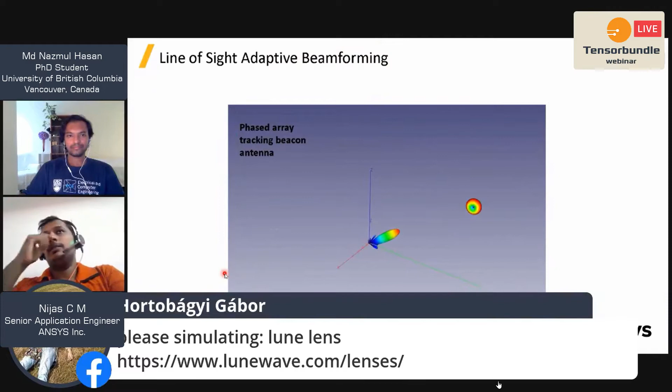But there are some high frequency bands also allotted. 28 gigahertz is the main one, and then 60 gigahertz is the other one. There are some limitations if you go with higher frequency. The advantage is you are getting very wide band. Your data rate will be so high. You can transfer data within seconds. The problem is that at higher frequency RF losses are very high. If you have a base station at 28 gigahertz outside, you need such a base station every 250 meters to have good communication. After 250 meters, the signal reduction is too much. Your system will not have that much speed.

So assume at 28 gigahertz every 250 meters you have array base stations, and at 60 gigahertz there is oxygen molecule absorption happening at that frequency. So it cannot be used externally. 60 gigahertz is mainly what people are trying to include in indoor Wi-Fi kind of wireless access points. So we are going to cover 28 and 60 gigahertz. So this is what it does in 5G.

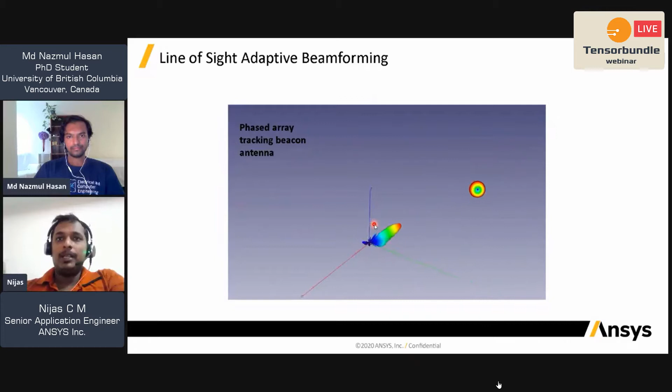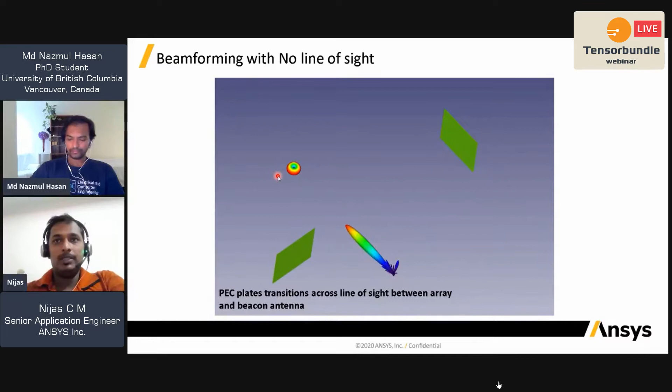In 5G, wherever the user equipment goes, assume this is a user equipment, your base station beam will follow you. This works perfectly fine if you don't have any blockage in the line of sight between the user equipment and the base station. The moment you have some kind of blockage, assume these two are metal and this is a user equipment, the moment the line of sight is blocked, your base station will scan for another alternate path. This is called adaptive beamforming. It will keep on checking your status, and the moment you have a blockage, it will change things.

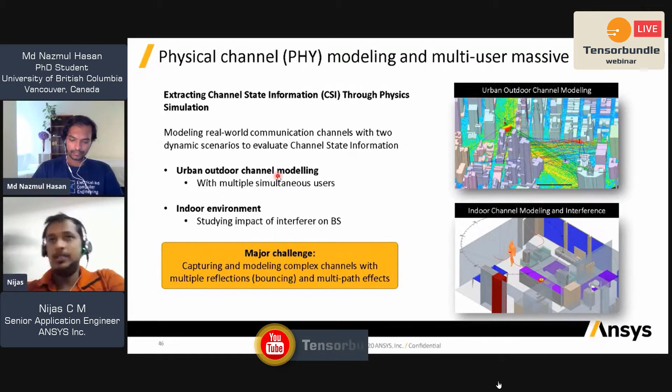So here we are going to discuss two cases. One is for outdoor simulation, one for indoor simulation. This is for 28 gigahertz, and this is for 60 gigahertz simulations. We'll go a little bit into 5G scenario simulations. Before going into 5G scenario simulation, we have seen in the earlier presentations that most of the simulations are taking like 200, 300, up to 400 GBs.

And assume if you want to simulate a large city kind of environment, then the requirement will be too high, right? So there the advantage of other solvers comes. So you solve your antenna with the FEM, and you simulate the scenario with an SBR kind of solver. SBR is nothing but shooting and bouncing rays technique. It will shoot the rays across the boundary. I will just show you a quick animation here.

So assume this is my city. I can import the city model into the tool and assign the material property of each model. And then I can place my simulated antenna on top of the point where I need it. So I can even place the base station. I can place the user equipments. So this is one user equipment, which is a mobile device, and on top of the building I have a base station antenna, which is simulated already.

And what SBR will do is, if you see the animation, it will shoot the rays to the entire area and paint the current because of that incidence. So depending on the material property, the microwave signal will be reflected back and forth between different multipaths. It will paint the current due to each multipath, and you can see this is a current which is painted with respect to different bounces in the SBR simulation.

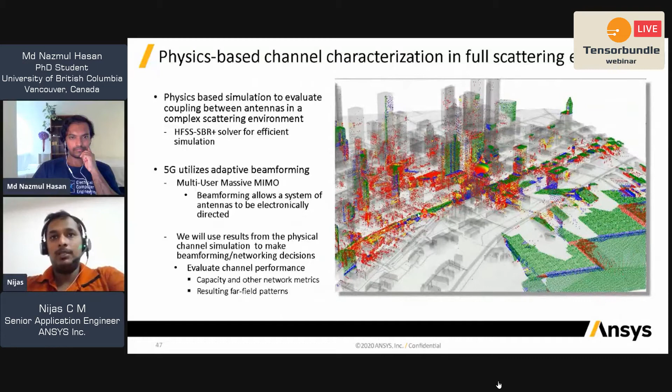Second one is antenna placement analysis. If you have an antenna which you designed for an aircraft or ship, the moment you keep that antenna on a ship or aircraft, because of the metal structure nearby, the pattern is going to completely change. You will be able to see how much the variation in the radiation pattern is.

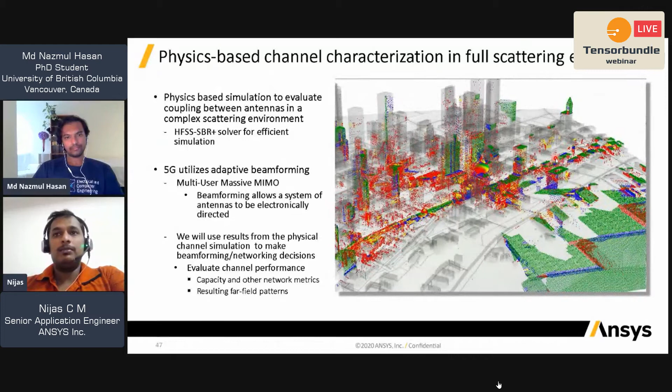And another application of SBR is radar cross-section, RCS, analysis. Within a fraction of minutes to an hour, you can simulate the RCS of big ships and other things. Okay, so let's go with massive MIMO.

So you have n number of antennas in an array over here. You have a user equipment. Practically, what the mobile device will do is send a pilot signal to the base station, and you are trying to calculate the magnitude and phase; mainly the phase is the one which plays, how much is the phase from this mobile to each antenna element of the array.

Once you calculate the phase, that is called channel state information. So you are capturing the channel state information with the complete scenario. With your city, you are simulating the complete scenario. It includes your multipath. Once your simulation is done, now I know the phase difference between this mobile and each element in my antenna array.

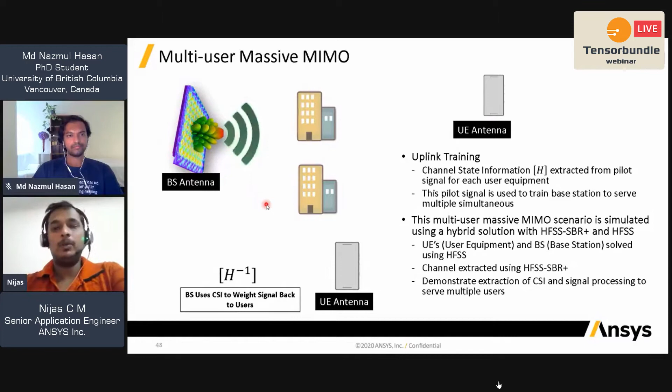Then I can take the inverse of that. So what will happen in the actual scenario is, it will direct the beam towards this particular user rather than radiating to the other one. So this technique is called the maximum ratio transmission algorithm. You are taking the channel state information and then doing the inverse of that.

There are other algorithms also. One is called the zero forcing beamforming algorithm. What it does is, always in a communication system, interference is the one which degrades the data rate.

Okay, so let's assume I have a base station and a user equipment which I need to have proper communication with. But if I have something like an interfering user equipment, what this algorithm will do is identify where the interfering user equipment is and try to reduce the radiation towards it, so that even though this is radiating, it is not going to affect the performance of this one. So you are getting a good signal-to-noise ratio, and you are less susceptible to the interference created by this system. That's the advantage this algorithm is going to give you.

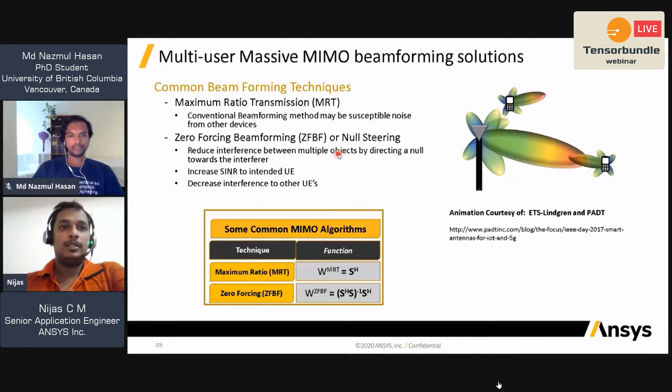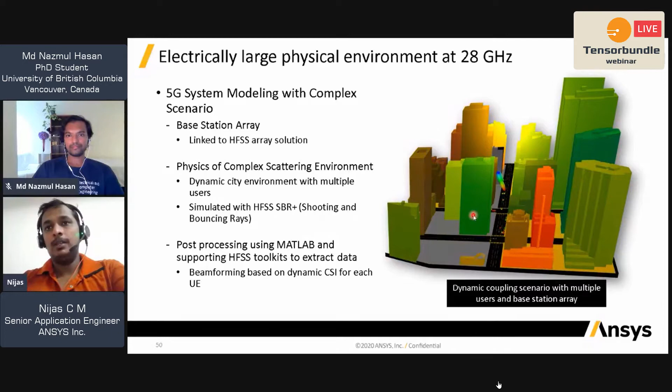You will get pretty good literature or data on these two algorithms. Coming back to the scenario simulations. What you can see is a portion of a city, and over here you can see a base station placed on top of a building, and multiple vehicles. Each vehicle is equipped with vehicle-to-vehicle communication antennas and other things. So we are going to see, as the vehicles move here and there, how the spatial distribution of the array system is trying to radiate towards different users.

Okay, so you can see this is the top view of that same city. You have the base station here, and your vehicles are moving in different directions. In the next one you are going to see the UV radiation space of these 5 user equipments. The beam is shifted to the 5 user equipments, and wherever these users move, you can see the radiation pattern also changing with respect to the users. Using spatial multiplexing, different parts of the antennas are radiating towards a particular user, and other antennas are radiating towards the other users.

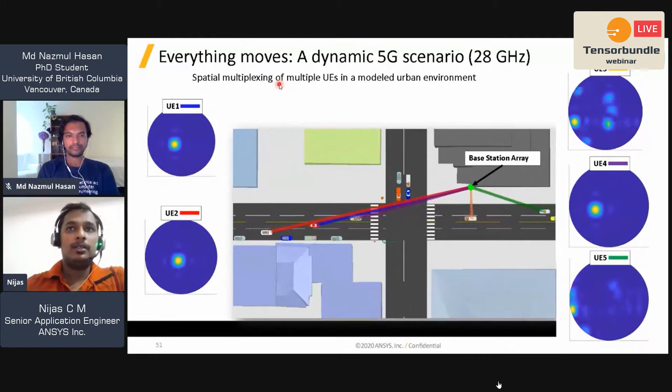Okay, so this is one example, and you will be able to see with respect to the position. If I'm changing the position of each vehicle, I'll be able to see the coupling between the base station and the user equipment or the vehicle. And you can see the base station to user equipment coupling has very high variations. Immediately it's going up and it's coming down. Why is it happening?

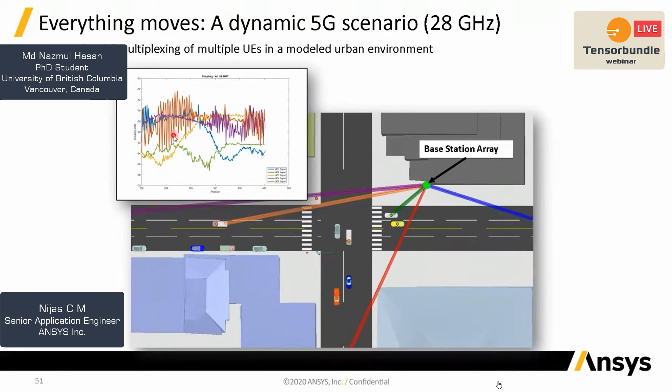It is happening because of multipath. If multipath happens, sometimes you will see construction of signals, sometimes destruction of signals. That's the reason you get a peak and then it comes down. Wherever you have a very good line of sight, you will get more or less steady signals. One interesting thing: if you see this green one, which is stopping at this point, the moment it stops, this coupling is also stabilized. So this is a parametric simulation. After each parametric simulation, it links with MATLAB and calculates what the coupling will be.

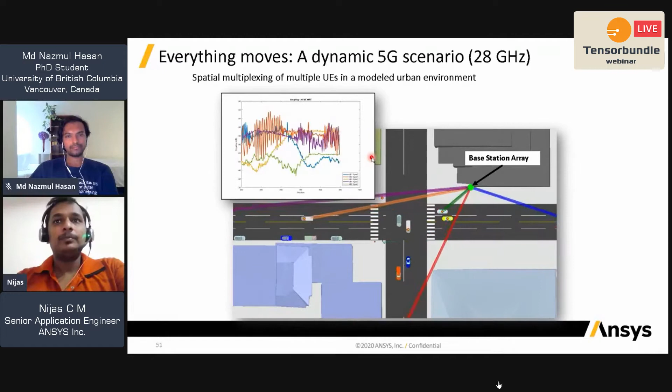Okay, coming to the second scenario, which is the indoor application, called Wi-Fi 6. It's working at 60 gigahertz. You can see 4x4 antenna array systems. At 60 gigahertz, you probably know the wavelength is about 5 to 6 mm, and simulating the entire building is itself a huge simulation. There is a base station, a 4x4 array with 16 elements, and a user equipment. My intention is to give proper radiation towards this guy so that the coupling will always be good. And when the person is moving, he is also carrying a mobile device which is an interfering device for this communication.

If I slow down the simulation, you can see that while this guy was walking, there is always a null following that person. Over here you can see it one more time: wherever he goes, there is a null which follows that particular user. These kinds of techniques will help 5G base station teams create different algorithms. They can simulate different scenarios, use different algorithms in the background, reduce the interference and increase the coupling between the base station and the user equipment. These are some of the simulations. That's all from my side.

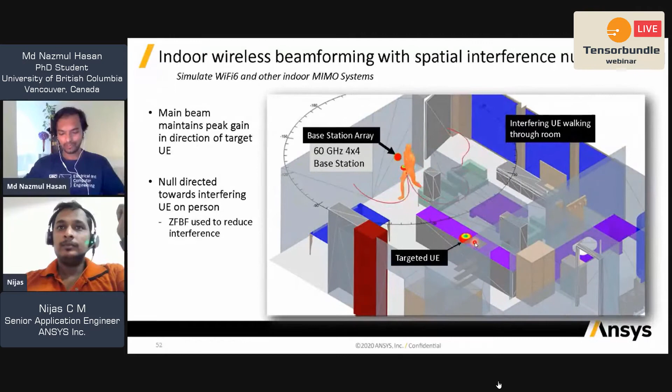So I have one question. For example, in the first session... Okay, could you please go back to page 9? Page 9. Okay, yeah, I think it's better to take it from this presentation.

Yes, over here. Okay. So in HFSS, is it possible to analyze or to know the angle of incidence and the angle of reflection from each individual element of the array? For example, I want to know at which particular angle the wave impinges on any element, and in which particular way. For example, in normal electromagnetics, when a wave impinges on an element, the angle of reflection is equal to the angle of incidence, right?

Yes, yes. But if I provide different phase angles in each port of the antenna elements in the array, for example, one element is given a different phase angle and another is different, in that case the angle of reflection will be different from each element because their phases are different. Correct. So how do I know that particular angle of reflection? Is it possible to know from HFSS? Yes, it's called an active S parameter. So the active S parameter will take care of that particular thing.

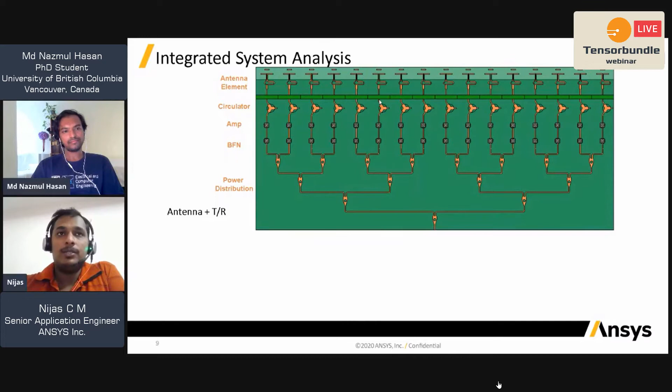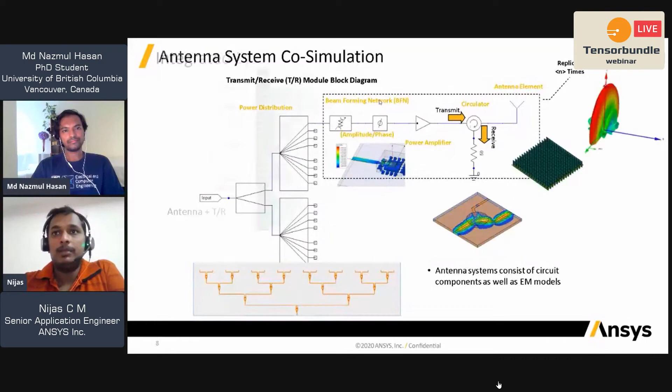But in the actual antenna array system, most of the antennas are working together, or most of the antennas are exciting with a little bit of phase difference. So the normal S parameter and the S parameter when the antennas are working will be different. So to capture that one, there is a term called active S parameter. I think I have it mentioned somewhere. Yes, here. So this is called active S parameter, which is calculated based on this particular equation.

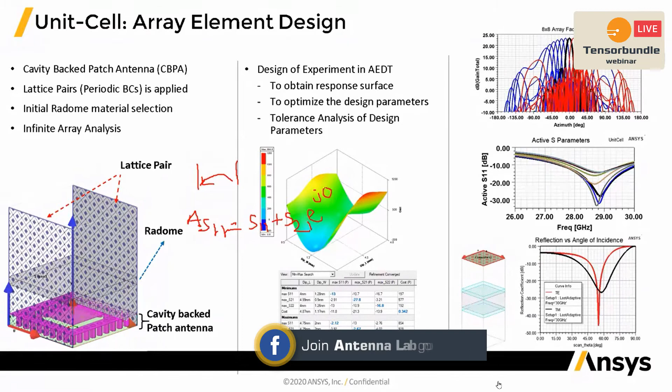So let's assume I have a pen. Let's take I have one antenna, I have another antenna. So the active S parameter AS11 is nothing but the S11 of my antenna. So this is the normal S11 of the antenna plus S21. S21 is the one which has the coupling between port 2 and port 1. And with e raised to j phi. So this is your excitation phase.

Okay. So assume this is my normal S11. Because of this S21 coupling and the excitation phase, I may get a different S parameter. Right. So this is called active S parameter, which you can directly get from HFSS. Thank you so much. You can reach out to me separately. I can share one good workshop material on how to do it manually.

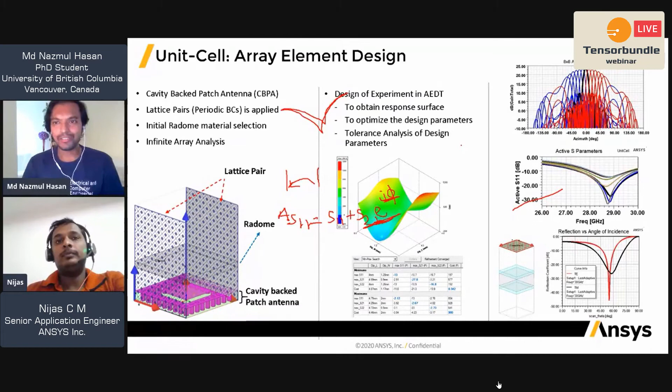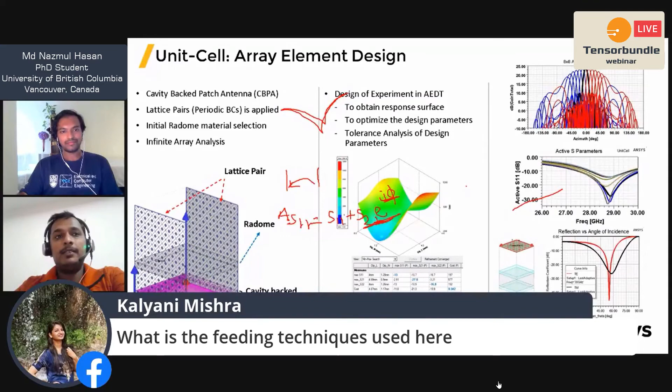So, a few questions from the audience. Kalyani Mishra is asking what's the feeding technique used here? Feeding techniques. Yes, feeding network, maybe she's asking. Okay. So this is a corporate feed, which you have seen, but there are different types of feeding: series feeding, corporate feeding, different types of feedings are there.

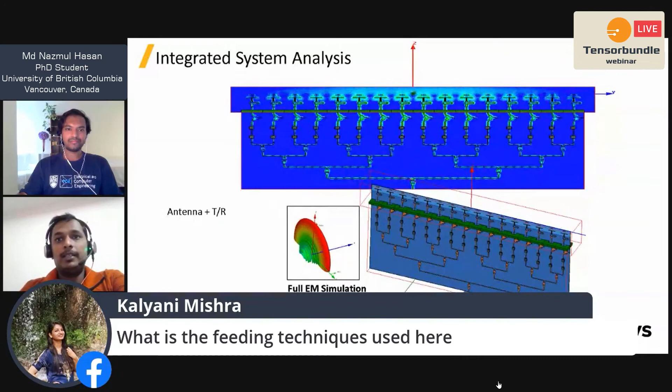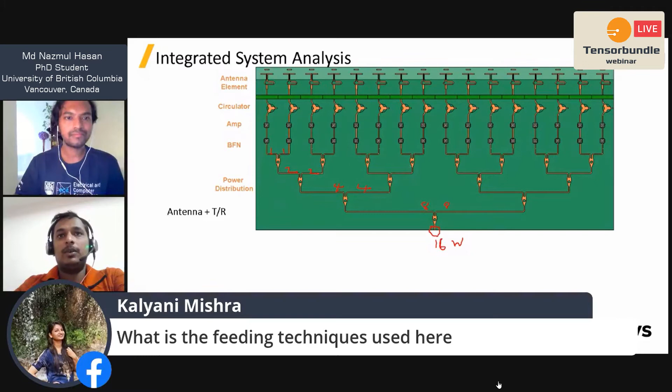So over here you're exciting port 1 with, let's assume, 16 watt. It would divide this power into 8 watt here, 8 watt here, then 4 watt here, 4 watt here, then 2 watt here, 2 watt here, then 1 watt here, 1 watt here. So if you do a literature survey on power dividers or feed systems for antenna arrays, you will see corporate feed, series feed, and other feeding systems. This is the corporate feeding technique. I see. Okay.

Waze Khan is asking how to find the combined gain of a two-port MIMO antenna. Okay, so the S parameters are, as I mentioned, if I have two antennas, you will get S11, S21, S22, and everything. So when I'm measuring or simulating the S11 of my system, I will assume this is terminated with the load impedance, which is 50 ohm.

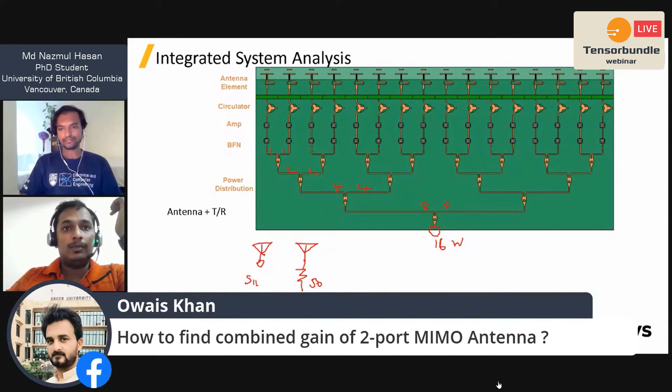And when I'm simulating the other one, I will assume this one is exciting and the other one is terminated with 50 ohm. So S parameters are independent of the excitation of elements. That's the normal S parameter versus the active S parameter, which I explained. But in HFSS, I can quickly show an example. Where is HFSS 2020? If I open HFSS with a simple example, I can show you where you need to change that for the MIMO system.

So there is an edit source in HFSS. You can just right click on the excitation, and it will open the edit source. There you can put the magnitude of excitation and the phase of the excitation. Immediately the result will change for the gain. So it's just one simulation. Then you can change your magnitude and phase, and immediately the results will get updated.

So if I quickly show this, for example, you go to examples, go to HFSS, go to antenna. You can see 5G. Okay, I can go to extra large. There is a 5G array with 77 gigahertz. There is something called simple antenna. Phased array units. No, not this one. Yeah, this one, planar. So I am just opening one example file.

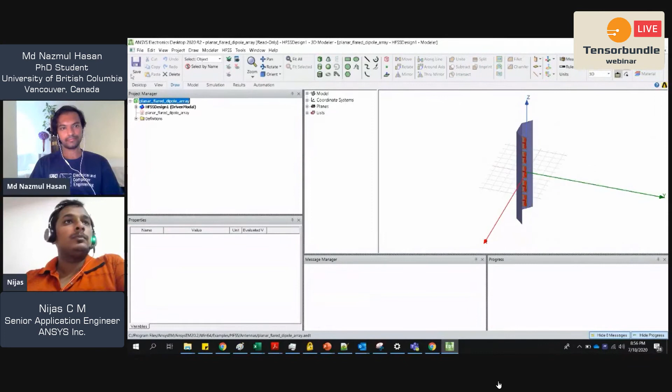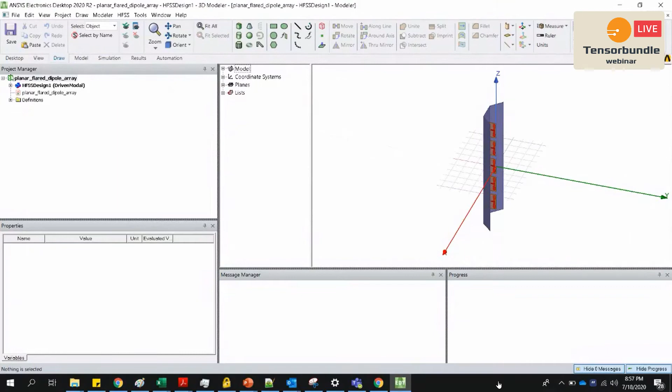Let me save that into a particular area. Facebook HFSS group. These are some of the examples I solved for some of your queries. Okay, let me try to run the simulation. It may take 1 minute. Meantime, if you have another question, I can try to answer that. So this is the place where you need to edit it. Okay, we have some other questions.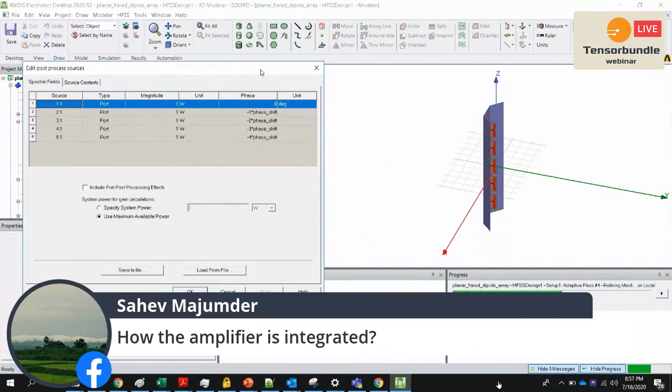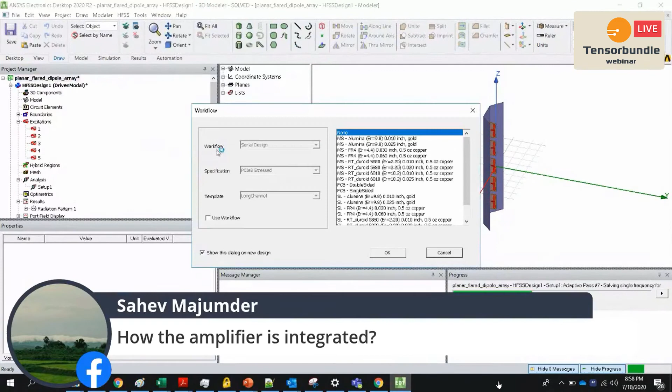For example, Sahev Majumder is asking how the amplifier is integrated into your power divider. As I mentioned, amplifiers are nonlinear devices that will not hold the Maxwell equations. So you need to couple your HFSS simulation into circuit simulation. I can quickly show an example here. I insert an HFSS circuit design, click OK. Then I can drag and drop the HFSS design into the circuit.

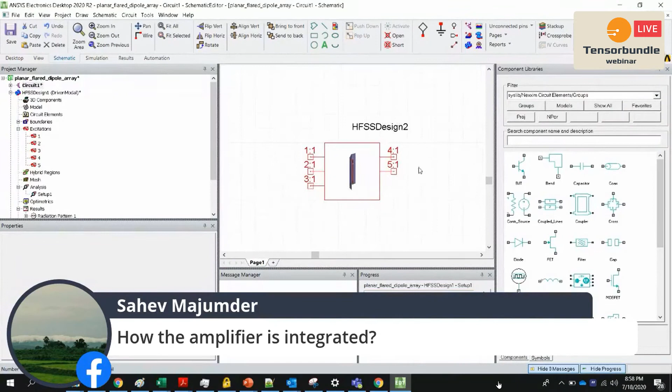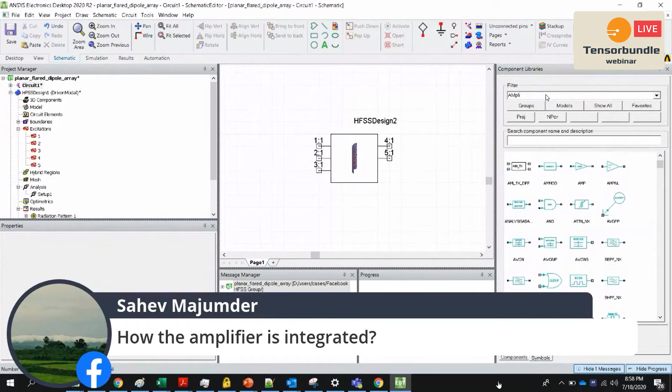So over here I had 5 ports on the HFSS. Those 5 ports came over here, and let's assume I wanted to create an amplifier. You can see all the components are there. If you are not able to get it, just click on show all and type amplifier. Sorry. If the search works, it is coming here, you can see the amplifier. If it is not able to find it, here is the list.

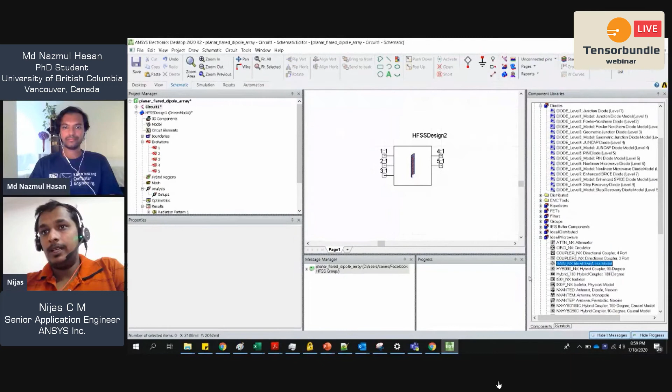If you want to see diodes, there are many diode models, with PIN diodes and others. If you want ideal microwave components, something like attenuator, circulator, coupler, gain, you can see the gain. This is the symbol gain system. So you can just keep the gain here. And if you click over here, you have options: what is the gain of your amplifier, what is the 1 dB compression point, what is the 3 dB compression point. All these values of an amplifier can be set.

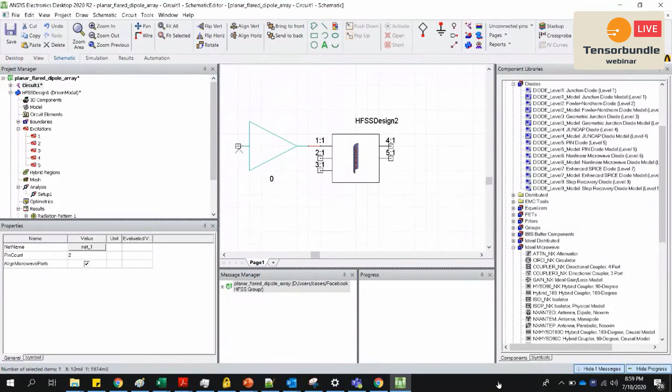Otherwise, if you get an amplifier from a vendor, they will give you the amplifier as a SPICE file. That also can be connected here. So you can connect a port here, use a wire, and specify it has an amplifier gain of 7 dB, and then run the analysis. You will get a complete system analysis. I can create a quick video showing how to do it and post it sometime next week on the same group.

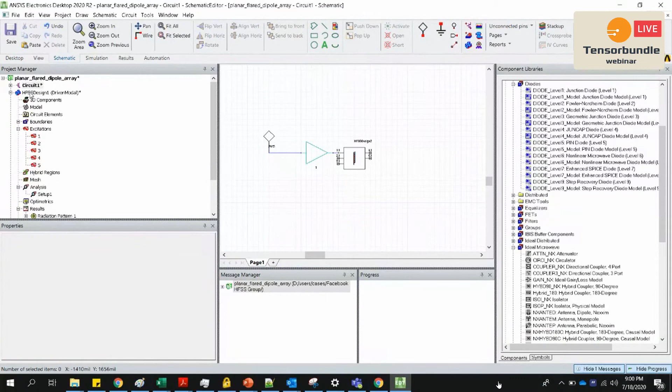So coming back to the second question, it was on how to combine it, right? So let's take this analysis.

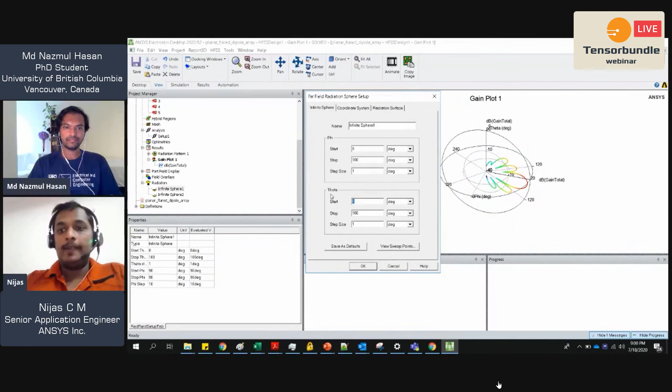I have right now all the antennas exciting here, okay? And if I do the complete radiation pattern, I just go here and put in the radiation pattern. Okay, this is for 2D, so I'll put 0 to 180. So in HFSS, most of the things are, you can say, post-processing. After the simulation, you can change everything. It will automatically update it. So this is the radiation pattern coming from all the antennas.

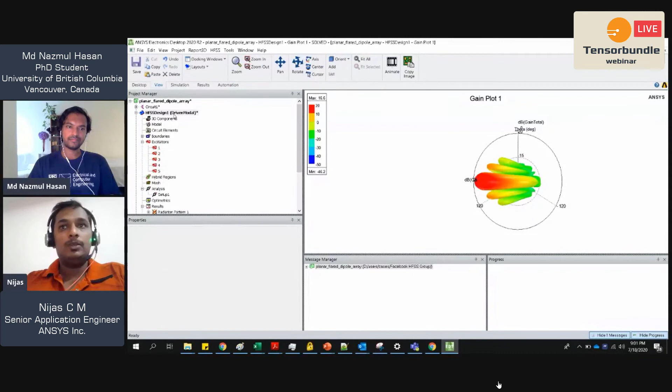Okay, so you can also see these antennas are not radiating exactly to the broadside because you set some kind of phase shift. If I change the phase shift of the antenna element, this is a progressive phase shift, it will immediately change. This is a broadside radiation. So if I right click and show modeler window, you will be able to see how the radiation is going to come out from the array. So this is a way we can easily put the, you can see this one.

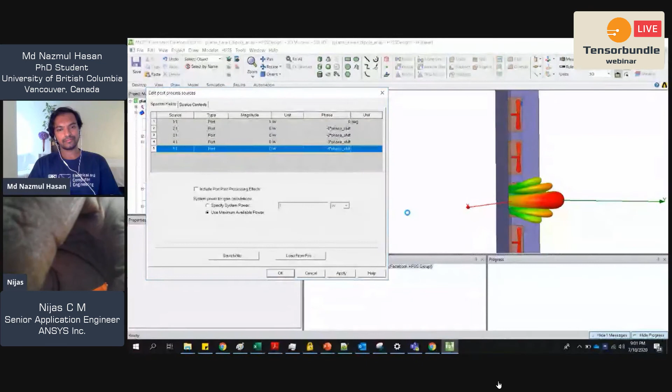Okay, let's say I wanted to see the radiation of one antenna element, so I can just go here and instead of all elements, I put the others as 0 0. Okay, now the pattern which you are going to see is for a single element. One minute, something fishy. Antenna. Okay, some issue with the result, where you should be able to see the single antenna pattern. But the principle is same, so we can figure it out.

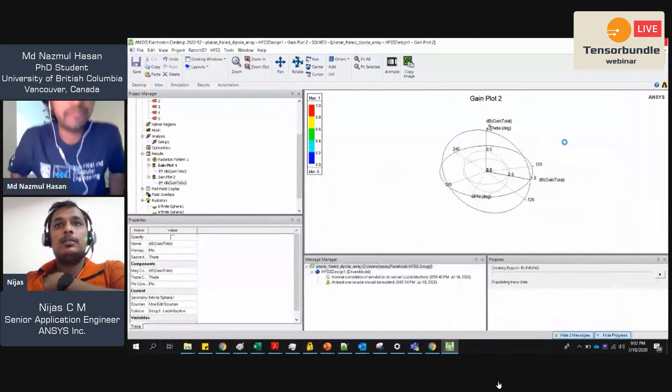No problem. Yeah, I think the principle is same. Yep, correct. The audience is smart enough to figure it out by themselves. I think so. But you explained the principle very well, so we can do that on our own. I hope so. Correct.

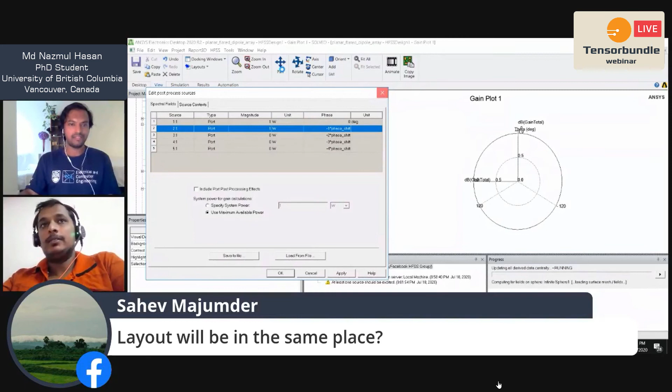No problem. Okay. Now, coming back to the next question, layout will be in the same place? Yeah, definitely. Yes, layout is in the same place. We generate the 3D model inside HFSS. I mean, he was talking about integrating the amplifier and then generating the layout, right? In the circuit. For example, we need to keep a space for the PCB amplifier within the layout. Yes, within that where you have the amplifier, you keep that space left over there. Exactly. And you keep an input port and output port for the amplifier, take that into the circuit and then do that. Right.